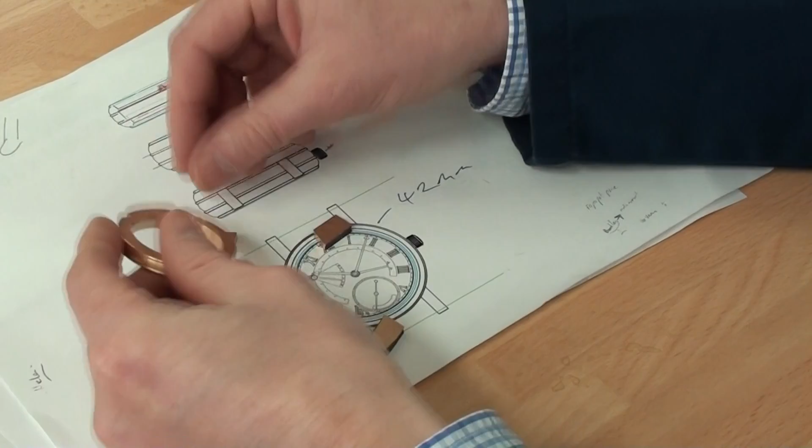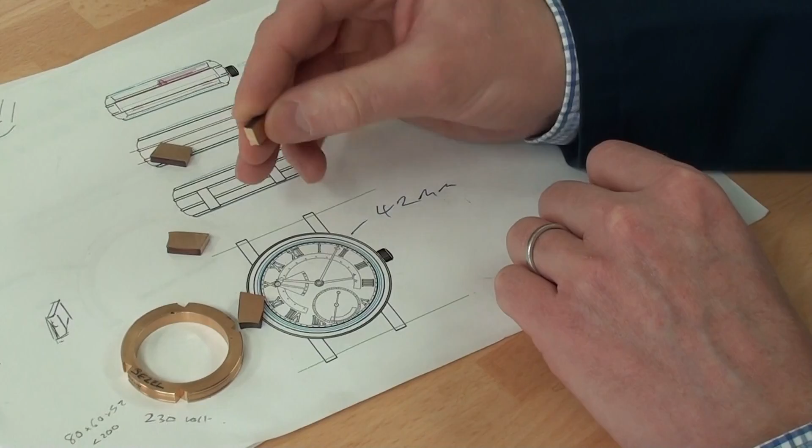So I now have the case middle, and it's been machined to accept the 4 lugs, and these are basically just square grooves into the case. The lugs I have made from 6mm square wire, and what I've done is rolled them out in the rolling mill to about 3.5mm thick, and I've also machined this angle face on the front of each lug.

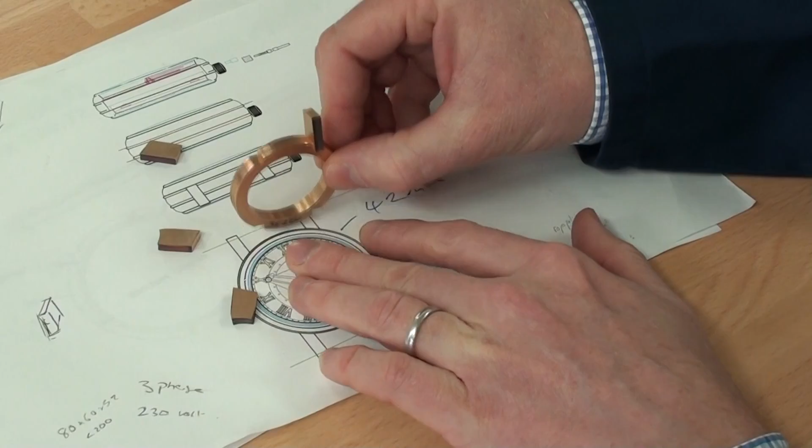And the reason for doing that is so that I get a nice angle for the lug when it's been soldered into position. So the next stage is to basically position this case middle in this upright position, and then what I'll do is I'll solder the lugs into position.

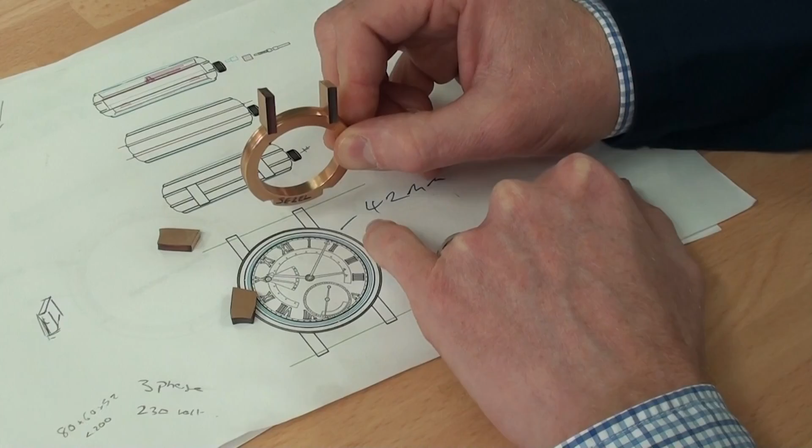And at the moment, this lug here is still quite tight in its groove, and what I need to do is just to make sure that that's a very loose drop-in fit, so that when the whole case is heated up and I apply the solder, then the solder will flow throughout the whole joint. At the moment it's too tight, and that will prevent the flowing of the solder.

So this is the next stage, just to take a little bit of material off the side here on a bit of emery paper, and just to give me the right thickness. We're now set up for the soldering process, and what I've done is to just hold this case middle vertical and just support it with these insulation blocks.

The lugs are now in position, and I've put borax around the joint, which helps to keep away the oxygen and helps the solder to flow. And also I've put 2 small fillets of solder on the inside of each lug, and hopefully when everything's heated up that'll be pulled through the joint. I'll put a small amount there at the moment. Hopefully it'll be enough, but I could always add to that at a later stage.

So now the plan is just to heat it up, always remembering to heat the case middle first, get the maximum amount of heat into the case middle. You don't really bother heating the lugs, because what you want to do is to pull the solder through the lugs. If you put heat directly onto the lugs, then the solder will bypass the case middle and just spread onto the lugs, which is not what we're after.

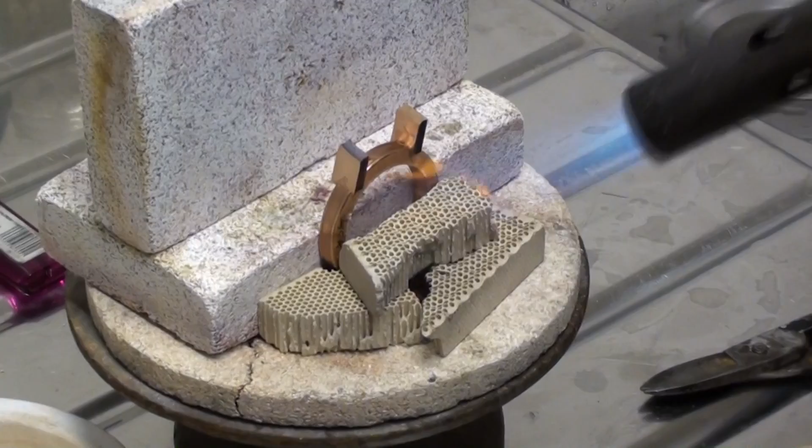Just very, very gently getting some heat into the case. You can see that the borax is now drying and holding the solder in position.

And what I'm now doing is just applying some heat more directly onto the inside of the ring, really just below the lug, where the lug is going to hopefully solder into position. Turn up the heat slightly.

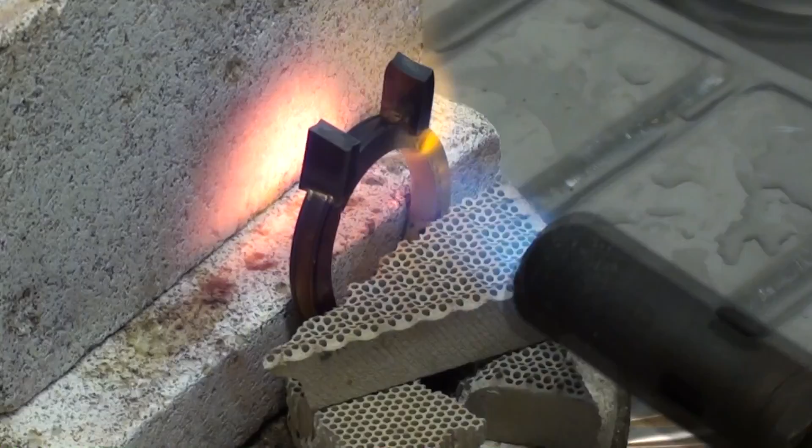So very gentle at first, just while the borax dries. Check that the solder's in the right position and hasn't jumped. That's fine. And that's it.